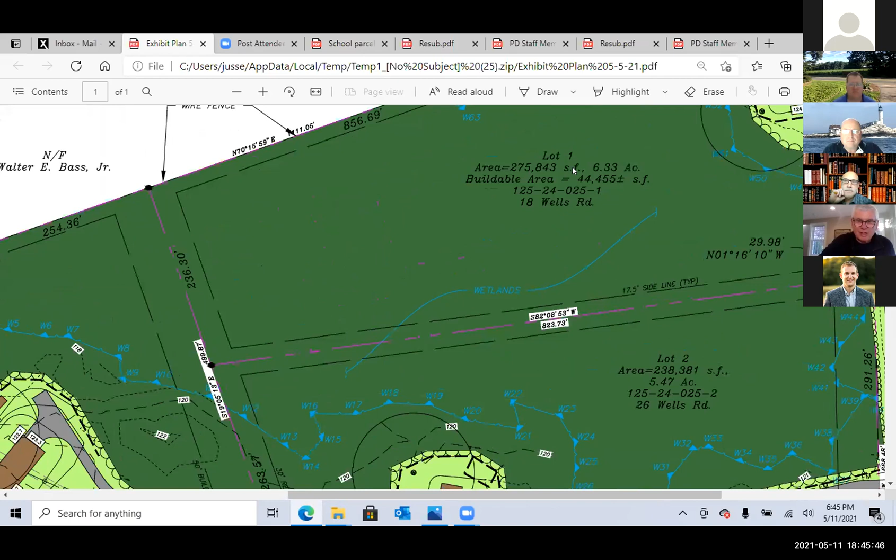So as I said, it's about 47 acres in total. We're proposing 4 total lots. Lot 1 is located here, just over 6 acres in size. I'm moving it around so we can all see it a little bigger, 6.3 acres total, the buildable area 44,455, which is just over your 43,560.

And we're showing a new home located up here in the front, some clearing limits, a wetland line that kind of wraps around the back and then goes off the property to the north.

We do have sanitary sewer here in Wells Road, which was part of the North Road sewer project that went in 3 or 4 years ago. It comes up Wells Road almost to the airport and could actually serve it, getting to within their frontage before stopping. This would go back to North Road and then westerly down to the pump station behind WB Mason. So we are tied into the sanitary sewer with all of these lots.

We're showing a proposed home fronting on the 50-foot building line. They'll be served by individual wells. We're showing a well to the rear and a shed off to the right rear of the house itself. The property's relatively level, elevated just a little above the road so the driveway pitches back a bit. It's totally wooded, with the area to the back all woods and everything up front wooded as well.

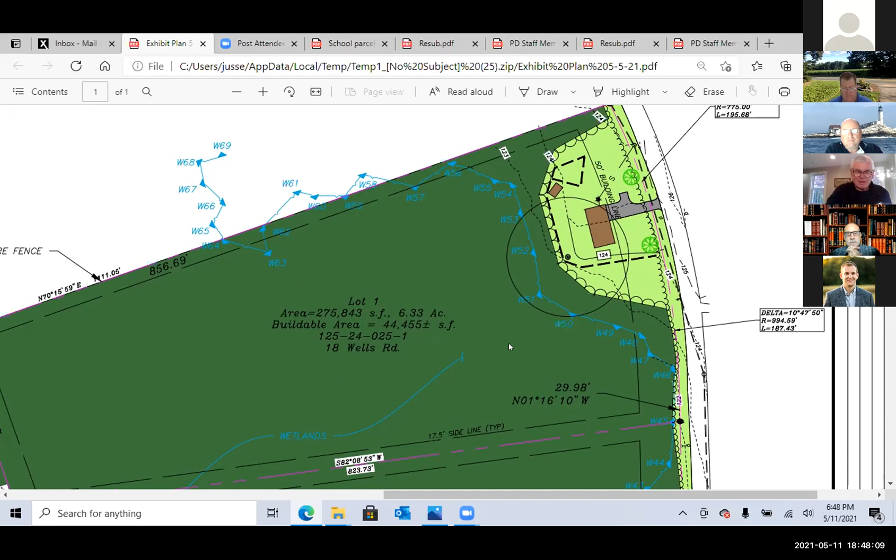My suggestion is that when these lots are sold and developed, you'll probably see individual plot plans on each one that may differ slightly from the concepts we're showing on the subdivision plan, with a look at that time by staff to see whether street trees are actually necessary on the remaining lots. The entire parcel is wooded almost up to the edge of the pavement, so putting street trees on the remaining lots now would mean cutting trees. It would be a bit difficult, so depending on how these lots are developed, some review with staff during the plot plans to determine whether street trees are necessary might be the right thing to do, maybe as a condition of approval.

Lot 2, when we go a little bigger, is 5.5 acres in size. One of Mike's comments was to add the buildable area to each lot, which I've done on a revised plan not shown on this presentation plan. All the other lots have substantial buildable area, I think all over 2 acres. I have a revised plan showing that, which was one of the things Mike requested in his memo. The buildable area on all remaining lots is fairly extensive, measured in acres, not square feet.

Lot 2 would be a frontage lot coming in off Wells, served with sanitary sewer, grinder pump, force main out to the street into the manhole, a well located to the rear, and a driveway coming into a fairly large upland area that's not a wetland. Lot 4, a little further south, just under 4 acres in size, also has a fairly substantial upland or buildable area of about 2 acres, again served by sanitary sewer, grinder pump, force main out to the road, tying into the existing sewer.

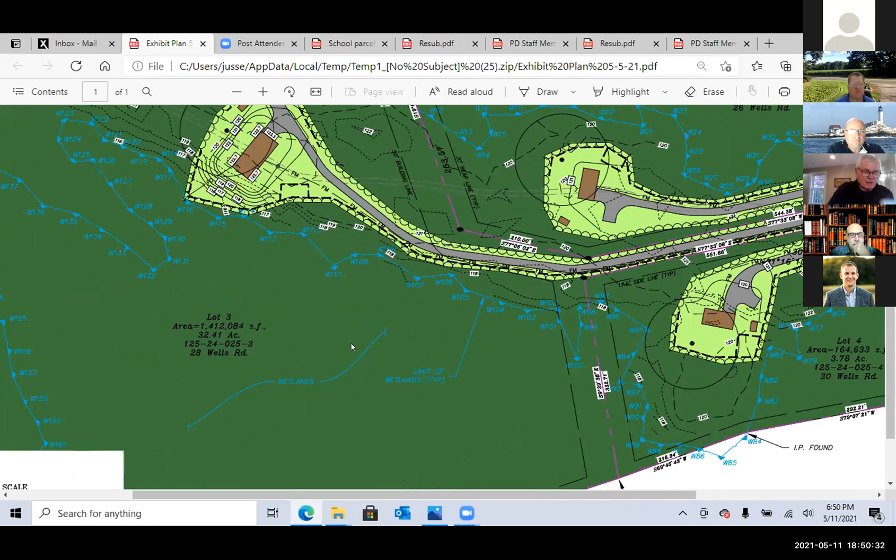The rear lot and special permit lot is lot 3, basically the remaining land at 32.5 acres, a very large lot. In this lot, unlike some others, the front area is fairly flat or level, but in the back we have a little topography, a small hill or knob, and the house sits up a little higher. We're able to get full basements with footing drains on this lot, again with a grinder pump and force main back out to the street, and we have the required 30 feet of frontage or strip going in.

If you looked at Mike's memo, that's one of the things he talked about in terms of your requirements for rear lots. It requires that the driveway be screened, and it also requires that along the building line, which is 50 feet, there be screening.

My comment is that it's all fairly wooded, and we're showing existing vegetation remaining between the driveways, with substantial wooded vegetation in back. My thought is that when this lot comes in with a plot plan and it's going to be developed, staff should take a look at it once we get the driveway in and see where exactly they're going to put the house, how extensive any clearing is, and whether we need additional screening, or whether the existing wooded area provides the screening necessary under your regulation.

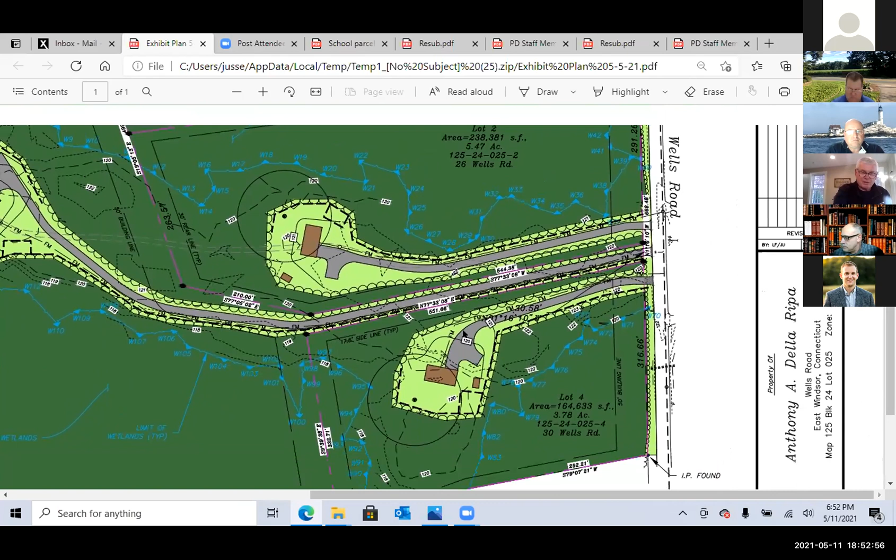I think it's something that really needs to be looked at at the time of construction by staff, and maybe us or a developer, to determine whether some more screening is necessary to be sure we're conforming to the regulation in terms of the rear lot and the screening provided. So that's a basic overview of the four lots.

Mike did have some other comments, and I sent him a memo. I don't know if you have a copy of it, but I believe I've addressed all his comments. There was one, however, that talked about the flood zone.

In the FEMA mapping that we look at, the flood areas talked about are numerous, and the one we're really most concerned about is the special flood hazard area, or the 100-year flood. There isn't any of that on this piece of property. Your regulations speak to the special flood hazard areas and the 100-year flood, and you have specific regulations about development in those areas, with a lot of special conditions that have to be adhered to.

On this particular parcel, way off to the west, within the wetland, there is a small area defined on the flood hazard map as other flood areas. So it's not a special flood hazard area and not a 100-year flood area. It's not an area you wouldn't be able to build on, assuming you get here on this particular parcel—I don't think you can—and it's not something that requires flood insurance through FEMA like the 100-year floods do.

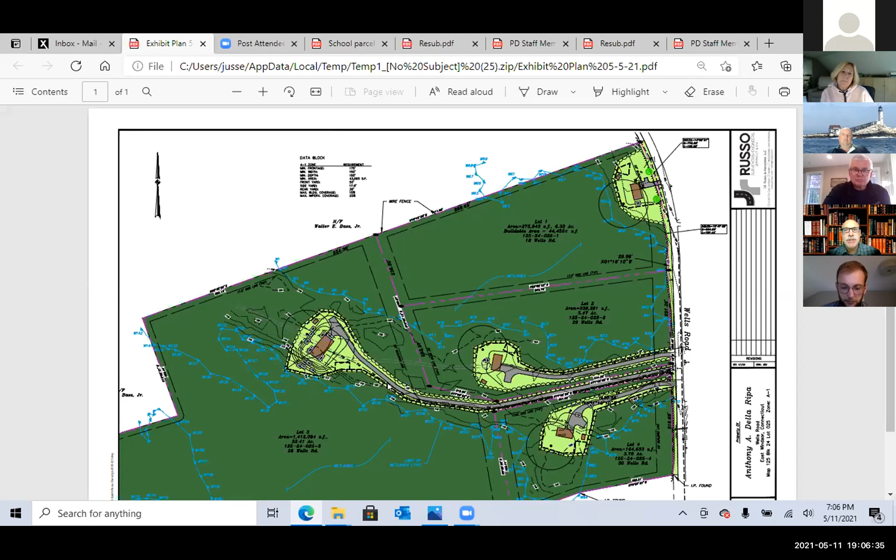I got a couple questions. In particular, lot 1 regarding the house position, and this is really about the roadway configuration. Obviously there's a vertical curve in the road there, but how about the horizontal? And at which sight distance would be limited at that driveway?

Looking to the north. You know, Joe, I would have to measure it. I couldn't tell you exactly what it is. I know standing at the edge of the road there, you can see up to Roller Cut Road where it comes in. I would have to measure it for you to tell you what it is. I mean, it's hundreds of feet. Is it 400 or 500? I don't know, I'm not sure of that, but I would actually have to go out there and measure it to tell you what it is. In working out there, I didn't really see anything that would have told me sightline was an issue there, but I can't tell you that I honestly measured it.

I wonder when the individual plot plans come into the town for approval, whether or not that's an element that staff is looking for, because these are just general concept plans, as you made mention, as you referred to earlier. So Mike D'Amato, would they be looking for something like that?

As far as the locations dealing with the roadway, the driveway curb cut onto the local street, it would go to Len Norton for review as part of that process. For an individual plot plan? Correct. Okay, I'm good with that.

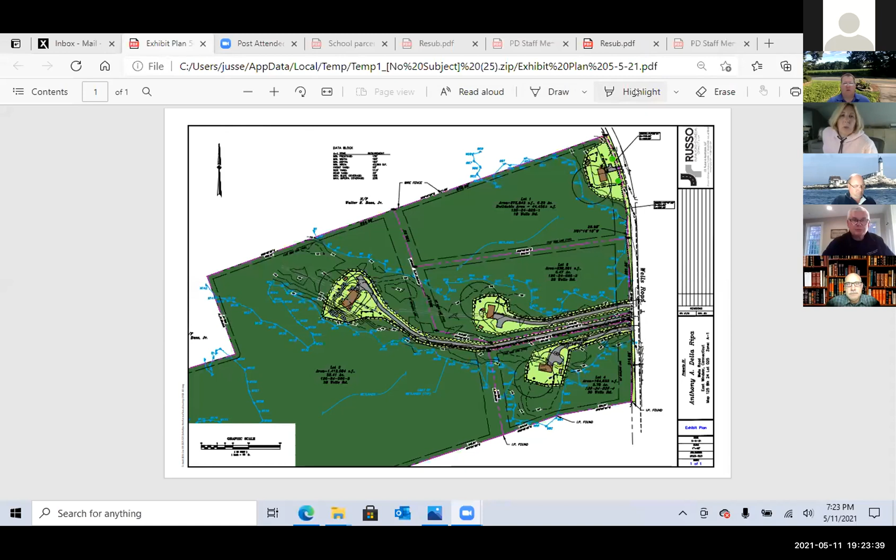So this is a Church Street property. It is a re-subdivision. And again, let me go to share screen here and see if we can get a plan up. There we go. Can everybody see that?

Yes. Okay, so this is 7 Church Street, as the application says. It's a re-subdivision. It's a parcel of land that borders the intermediate school on the north side, on the east side, and partially off to the west side.

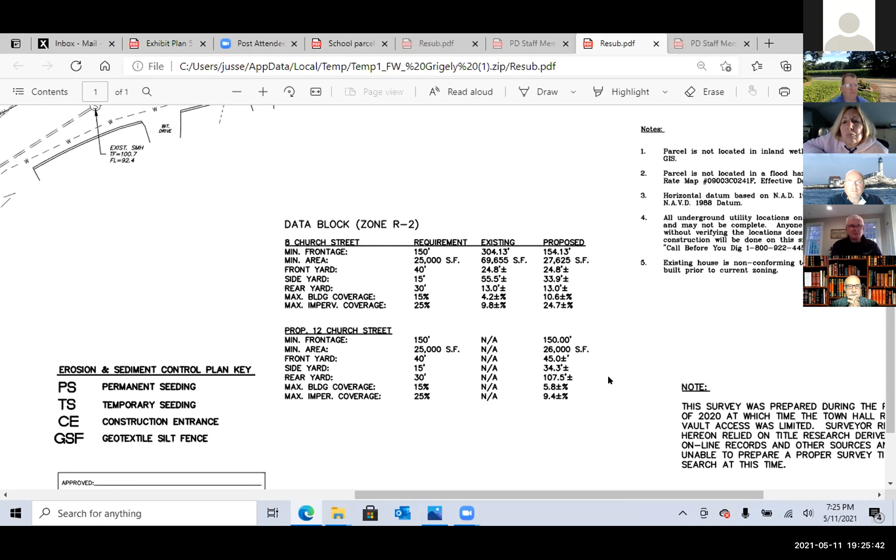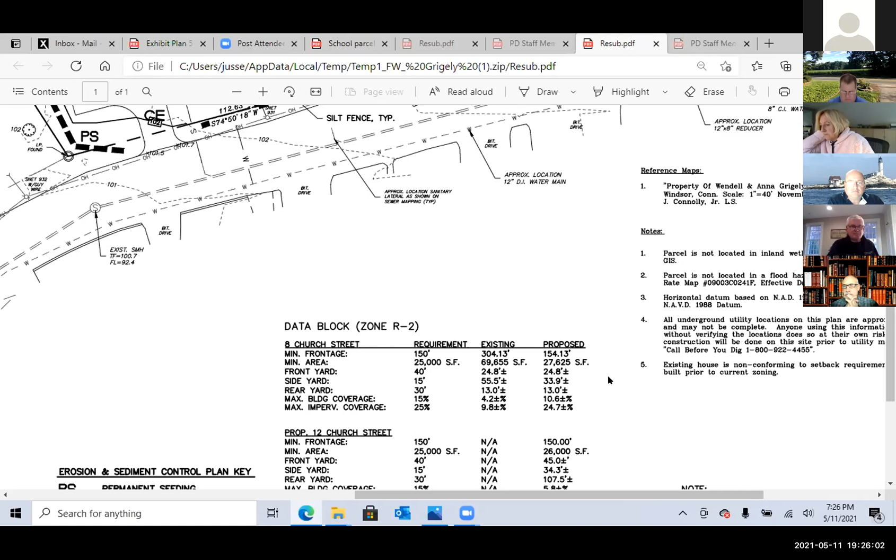We can tie it into the sewer and into the water. And then when we do that, the existing house still has enough remaining land to meet the frontage. We've got 154 feet of frontage left for 8 Church. It's got 27,600 square feet of lot area left. And it meets all the required setbacks.

Because it's essentially existing and we're not changing any of those, the new lot line that we're creating keeps the setback requirements within the required minimums for your zone and doesn't create any nonconformities. The existing garage and shed don't meet the rear yard requirement, but that has nothing to do with this proposed re-subdivision. They don't meet it now. The existing house doesn't meet the front yard requirement, but again, it's an existing condition and really has nothing to do with the current 40-foot building line requirement and doesn't involve the re-subdivision.

It's an older home. I don't know if any of you have been by it. It's a beautiful brick home. In fact, I went by it again today, which I normally do before a meeting, and kind of looked at it myself and said, boy, that's really a nice house. And maybe it needs a little work. I don't know on the inside, but it's a very pretty home on Church Street, probably one of the nicer houses there. So here conceptually, we're proposing a new home on what we're calling 12 Church Street.

And again, 26,000 square feet, so meets your minimum, 150 feet of frontage, and a new lot line along between the other house and outbuildings, which comes here off of Church, comes back, turns to the left, and then again goes to the back lot line adjacent to the intermediate school.

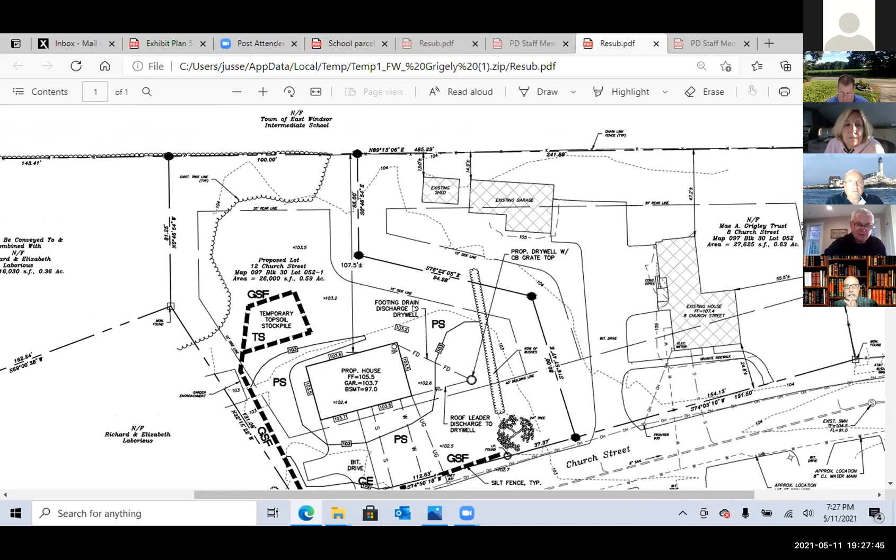It's all open except for the rear parcel here. You see there's an existing brush line or tree line. And again, this is an open field. There's a row of hedges located here and one large, I think 24-inch tree that's located up here in the front, which we would like to remain. Again, sewer and water connections out to the street, bituminous driveway.

Did have a couple of comments from Len Norton with regard to the drainage. He asked us to provide a dry well for the roof water, which Tim Kuhn has added over here. And we've got also a footing drain, or a sump pump going into that if it's needed. I'm not sure that it would be here.

It's pretty sandy. And then he asked us to grade the driveway and kind of tilt it to the side, if you will. If you look at the contours crossing the driveway, they're not perpendicular to the driveway itself. So we're shedding the water off of the driveway into the lawn area before it gets out into the street.

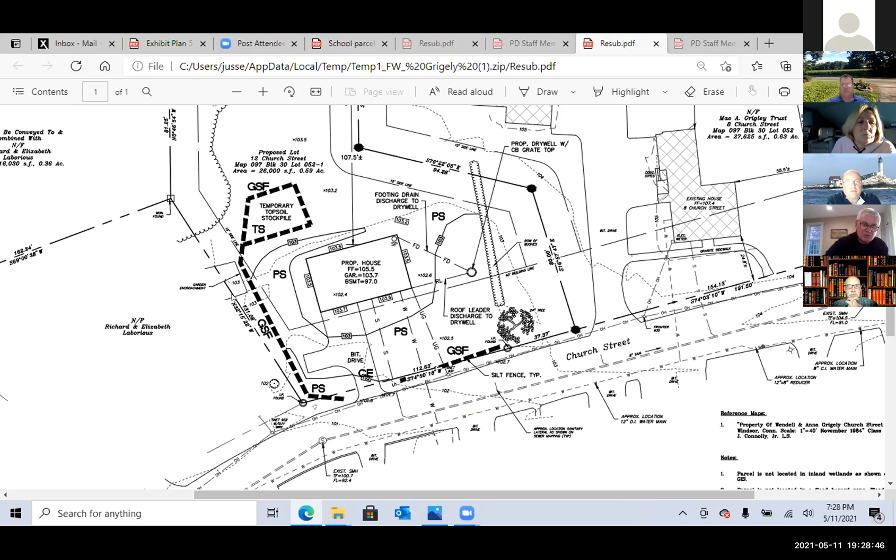So those were a couple of comments that Len Norton had, and we've addressed those and sent this information back to staff. I don't know if you have a new memo from Len yet. You may not have, but it's something that we did do, and believe that we meet the requirements that Len was looking for to make it a little more desirable for him in terms of mitigating any additional runoff coming from the property with the new house and the driveway.

Again, there's some waivers that we're looking for here in terms of sidewalks and streetlights, and it's an existing roadway, obviously, and we're not proposing any new roads. And we're also looking for a waiver of the open space. And here we have a situation that's a little bit different.

And I did run across it once before in another application a few years back, and I don't remember whether it was in East Windsor, but what's happened here is that back in 1965, Dave Grigley's, and I'm going to say grandfather, and I'm sorry if I'm wrong, Dave, I don't think it was your dad, but I think it was your grandfather, gifted about 8 acres of land to the town when they were constructing the intermediate school.

And it was part of this farm, or the Grigley farm, I think is what I'm calling it. And I believe they were farmers. And he gave this land to the school in '65, or to the town. And when we look at the deed, it says consideration was $1. The assessor's card says that there was no consideration, that it was gifted, I guess, if you will.

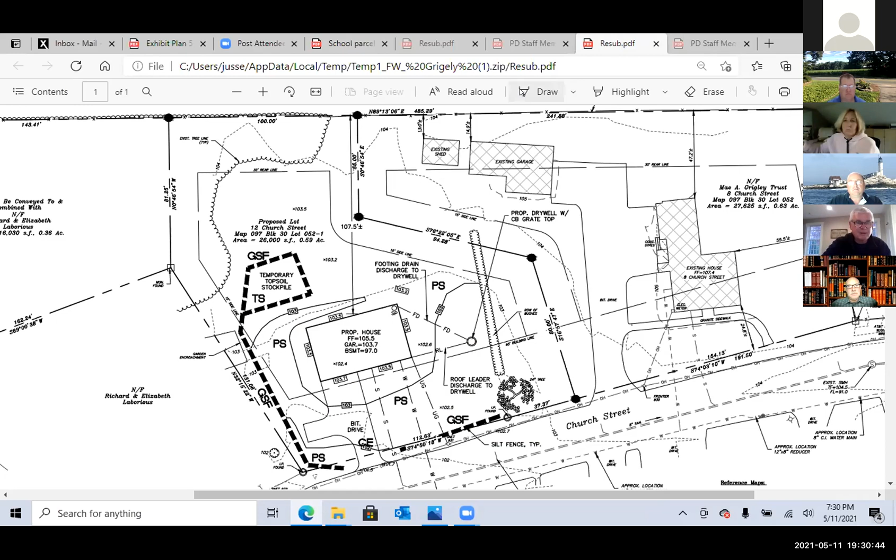And I sent copies of that information over to Mike, and I don't know if he shared it with you, but if you'd like to see it, I think I could show it to you so we could take a look, and just bear with me here for a minute. Let me see if I can pull it up.

So can everybody see this? No, not yet. No, not yet. Okay, hold on. How about now? Yes. Okay.

So this is a survey that was done back in 1965, and it was done for the town of East Windsor by Hayden Griswold. And what it shows here is a number of parcels of land, and you can see here it's labeled school site. Over here it's called open space. The piece that I've got highlighted here in yellow is about 8 acres as I scaled it out, because it doesn't give an acreage. And if you look right here below where it says open space, it says now or formerly Grigley.

The part that we're looking at right now in terms of this re-subdivision is right here where my cursor is at Church Street, and it says Wendell and Anna Grigley. And this is the piece of land that we're now looking at that's part of this re-subdivision. They retained that. This was their home, the garage and the shed and so forth, and the rest of the farm. They kept that and they continued to live there, but they gifted this 8 acres to the town of East Windsor. And this particular survey shows that. It also shows other parcels here that were part of the school site that were owned by other owners, but this happens to be the Grigley parcel here.

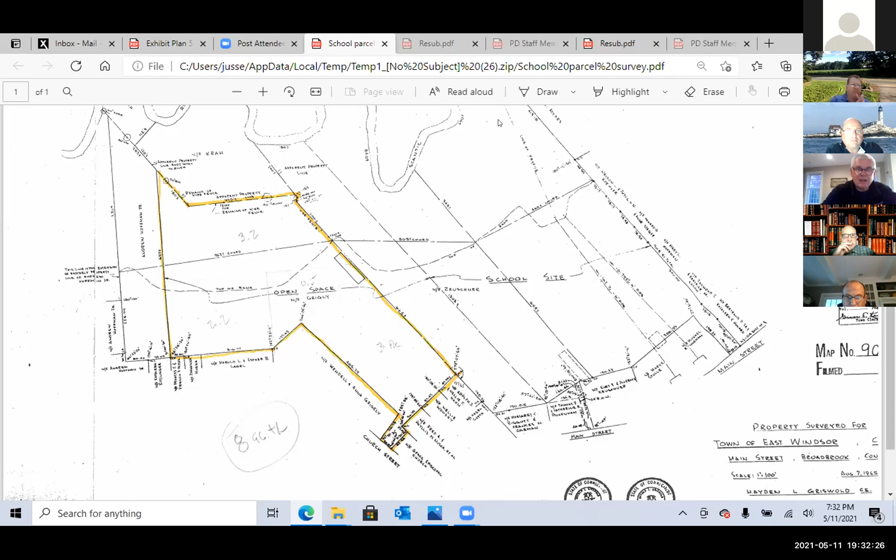Now, I also have here, and let me see if I can come up with that. That's what I'm looking for. Well, maybe I don't have it. I thought I did. I thought I had the deed and I thought I had the assessor's card, which I sent over to Mike, but I don't think I must not have scanned it.

So let me go back to the resub plan. So can everybody see the resub plan now? No, it's not up yet. Okay, hold on again.

Jay, you have to get used to sharing all these plans. We'll be back in person. I hope so, I'm ready. How about now? It's there. Yep, okay.

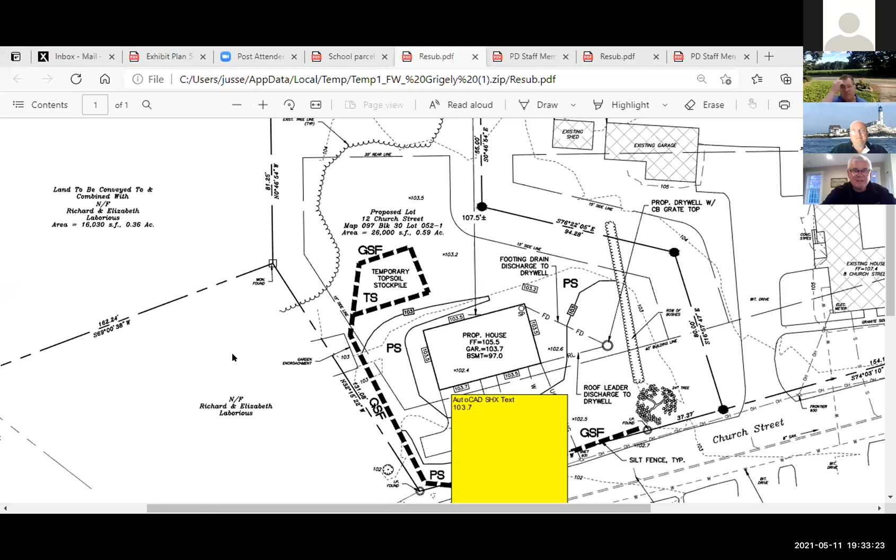So again, the school is off here to the north, and that's the 8 acres that was shown on that plan. I did send along a copy of a deed, and the deed actually matches the deed reference on the assessor's card. The dates match—it was 1965 when it was conveyed to the town.

According to Dave, he remembers his grandfather saying that some of the school land was part of the former Grigley farm that he gave to the town back in 1965. So that was the reason for the request for the waiver on the open space—a substantial amount of acreage was donated to the town some years back. It appears we've got pretty sufficient evidence indicating that that actually happened.

So that's one of the waivers we were looking at, along with the sidewalks and the streetlights. I think we addressed Len Norton's comments with the addition of the dry well for the roof leaders. I don't think there was anything else in Mike D'Amato's memo that I missed, and I know he'll chime in if I did, because I could have.

But that's an overview of what we're looking to do here. So it's one new lot, meeting your minimum requirements for the zone, existing house, garage, and shed being retained, and then that portion of the rear piece of land over here to the west or northwest, which will be combined with the property owned by Richard and Elizabeth Laborious.

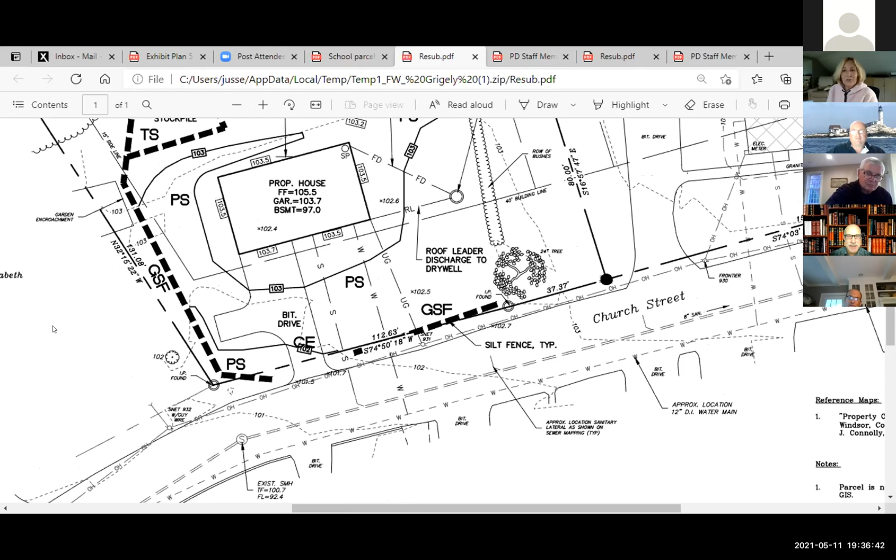I don't know the street at night, so I can't really comment on the street lights. I would like input from anybody on the commission who has driven that at night. Yeah, I know somebody who might be able to weigh in on that. Right, that's what I was hoping.

I think that the concept of having donated 8 acres to the town is a very reasonable concept, unless the commission has in the past not accepted that kind of idea, or we can't. But I think that's a very good argument. So that's really all I have on that.

Thank you, Ann. Mike Kozlowski? Yeah, I am very familiar with this location. There are street lights, and there's a pole, I believe, right in front of that property that I think has a light on it, right there. I've lived on this street for over 20 plus years—it's always looked to me like a vacant building lot. So it makes sense that it gets developed into something.

That's all I got. Do you have an opinion regarding the open space and the sidewalks, with the waiver request for both? Yeah, I mean, as much as I would love to see sidewalks on our street, unless we did the entire street, that little part would have no value at all. And I think the family has been more than generous to the town already, providing all that land for the school system.

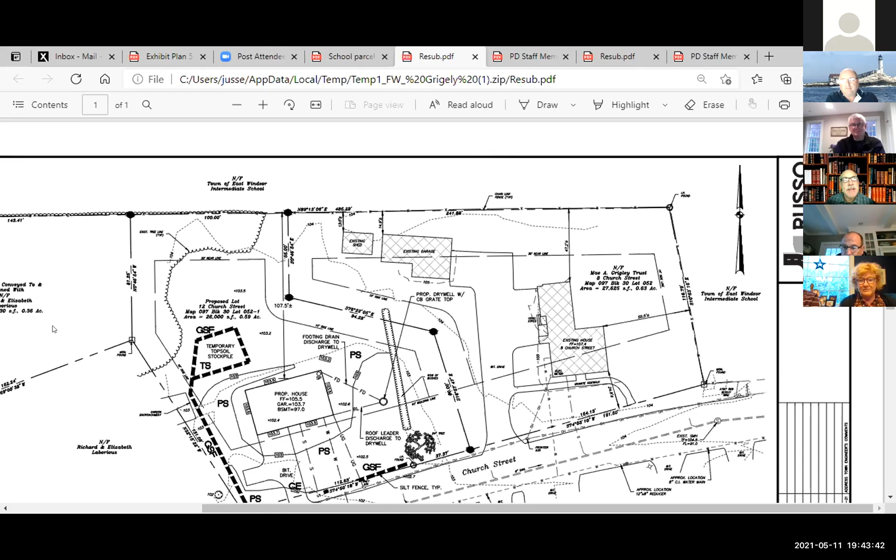Mike D'Amato, do you need some more time other than tonight to research whether this course of action is legally binding by the commission? Because I think that's the way we'd like to head. Do you want some more time just to confirm that, so we don't get ourselves into trouble? As much as I'm sure we'd like to get it done tonight, I would like a little bit of time.

There's no question that the provision of giving this parcel to the town absolutely meets the intent of the regulations. If you read it, it's very clear. The problem is when you start talking about exemptions, it's also very clear that we would not be waiving the open space, because they've given open space, so we're not issuing the waiver, so you guys can't approve the waiver. We would have to basically back into an acknowledgement through a note on the plan and a finding that they provided open space to the town in a total of 8 acres, which we would note on the plan, right? So like the commissioner said, it happened in a different order, but we're not waiving the requirement because they provided well beyond what would have been required if the subdivision were approved. I just don't want to get you guys backed into a corner down the road, and there's some language in here that talks about at the time of application, and some other things. So I would prefer to have a little bit of time to pull something together so that we're ironclad with the understanding that that's the way we want to go.

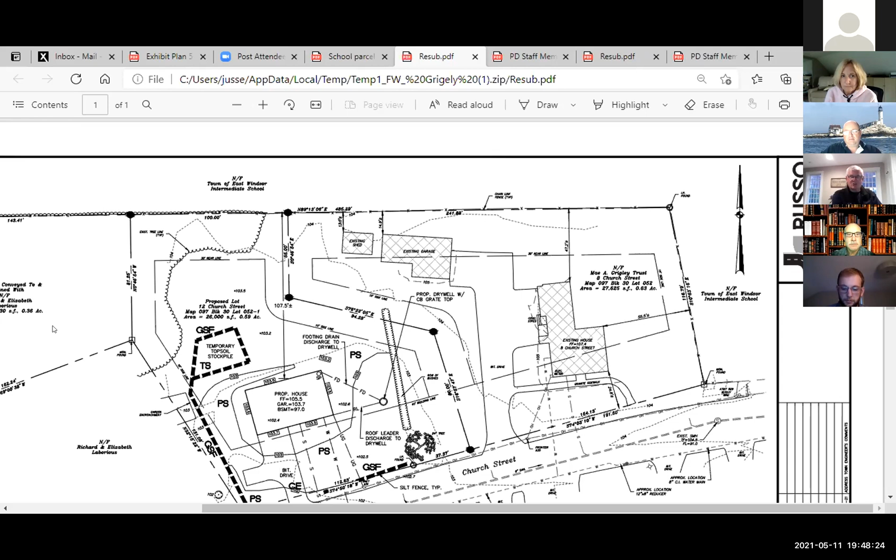So unless Dave Grigley or Betsy have an issue with keeping the hearing open for a couple more weeks, I think that's fine on my end, and we can put something together to make everybody comfortable with what we're doing as it moves forward.

I have no objections, Jay. Fine. Jay, I'm fine with that. I think that's a good solution.

Okay, terrific. Thank you. So any final comments from the commission or staff before we continue the public hearing to our next meeting? Yes, Mike. I mean, this parcel of open space, if we were looking at a brand new application for development, it would meet all the criteria for what we want for open space. It's adjacent to publicly owned land, it has value. So I think all of the open space requirements are met regardless with that piece of property. We're not doing anything that we wouldn't normally accept as open space, just in reverse order. Exactly.

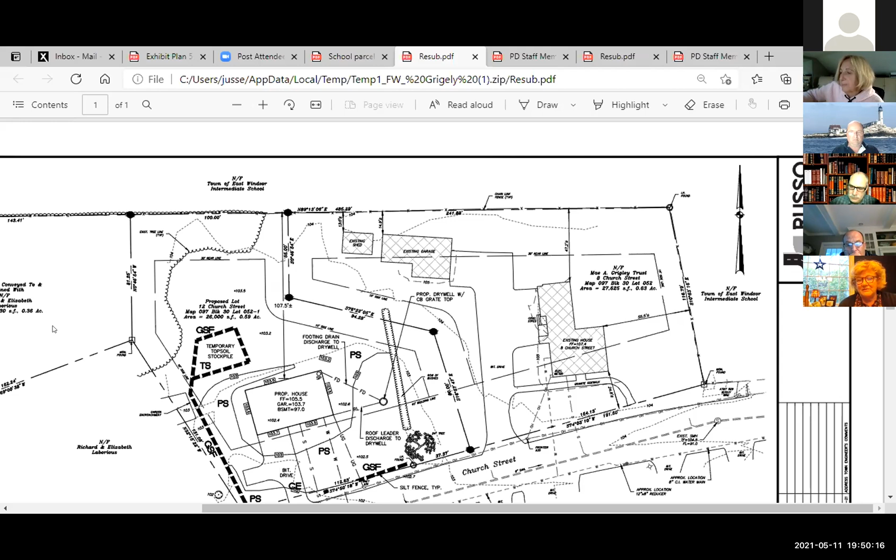Very good. Okay, with that, I'll entertain a motion to continue the public hearing to our next meeting. I'll move to continue the public hearing on application PZ 2021-17, 8 Church Street re-subdivision. It's a 1-lot re-subdivision, map 097, block 30, lot 52. It's an R2 zone, and it will be continued until our next meeting, which is May 25th. There's a motion on the table to continue the public hearing to May 25th. Is there a second? Second.

There's a second. Any discussion? Hearing none, I call for a vote. All those in favor say aye or raise their hand. Aye. I see aye, 4 hands, unanimous. Thank you for being patient with us, and see you in 2 weeks. Thank you. Thank you.

Next, our last public hearing for tonight: PZ-2021-18, 76 and 84 North Road and 7 Winkler Road. Special use permit application for construction of an automatic car wash accessory to an existing automotive filling station. The owner applicant is Noble Energy Real Estate.

Good afternoon, Tim. Good evening. Welcome to the second part of the J.R. Russo tag team.

I am Tim Kuhn with J.R. Russo, here tonight representing Noble Energy Real Estate, along with Mike Frisbee, the owner and applicant. You likely recall that we were in front of you in March with a request for a text amendment that allows a car wash as an accessory use to an automotive filling station in the B3 zone, and you were kind enough to approve that text amendment. So we are here tonight with our site plan, seeking site plan and special use permit approval for this car wash. I will share my screen if I am allowed.

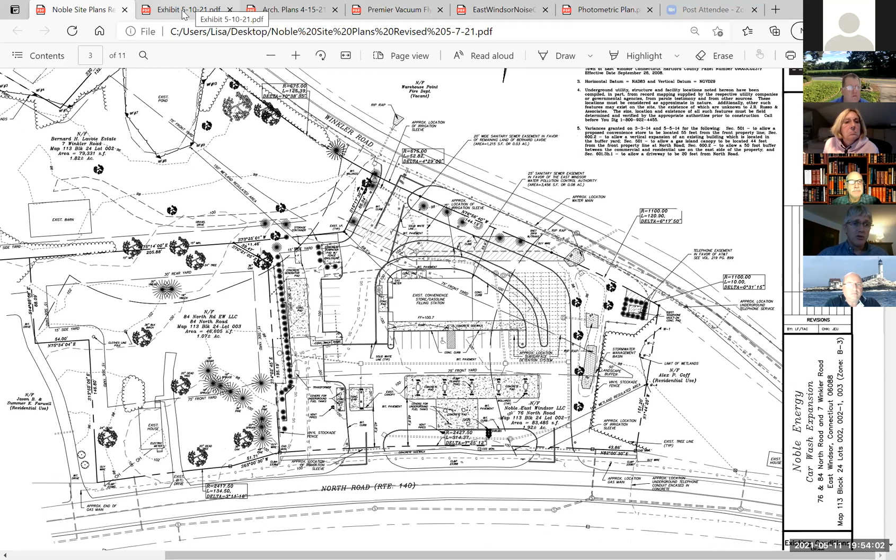So we are proposing to merge the 3 lots and construct a 2,771 square foot car wash, which is an automated car wash, accessory to the existing gas station.

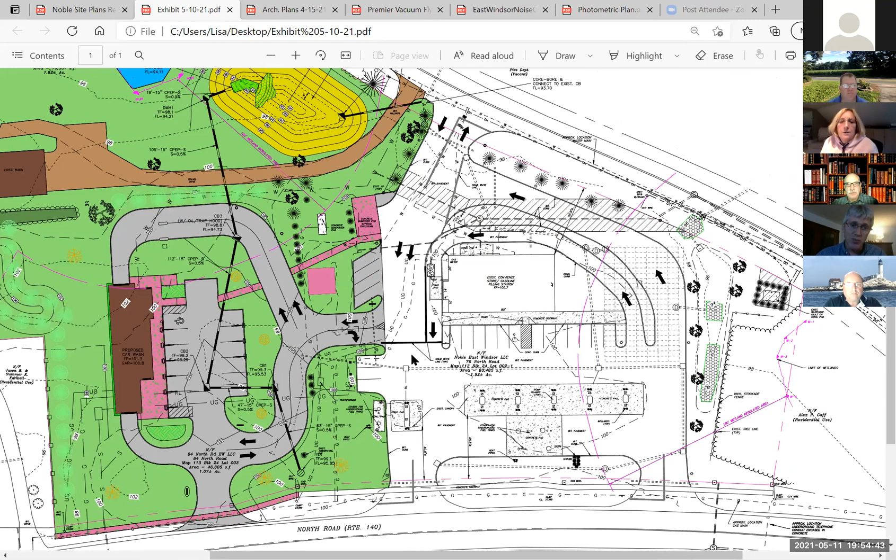Access, we are proposing a curb cut off of North Road, as well as an interconnection with the existing driveway that goes around the gas station. As you recall, the gas station circulation is essentially one-way counterclockwise around the building, and you'll notice that it comes here. So this portion of the driveway is currently one way from south to north through this area.

There will be a parking lot to the west of the building. This will be the location of a couple of employee spaces, as well as some vacuum facilities. There will be a queuing lane for the automated car wash, which kind of wraps up and around to the south of the building. You go through the automated car wash, you come out on the north side, and then you can either go back out to North Road or back to the gas station.

I will also mention at this point in time, the application does include the installation of 3 new electric charging stations at the 3 existing parking spaces at the existing gas station. Right now, we're showing them located here, although I believe there's also the potential that they might be moved up to these northern spaces. That's something I don't know if he's decided on yet.

The site will be served by municipal water, sewer, and natural gas. The car wash will have a water recycling system, which I believe reclaims approximately 65% of the wash water for reuse. The site will also be served by a new on-site stormwater management system, which will include catch basins in the paved areas and parking lots to collect the runoff and convey it to a new stormwater management basin, which will be constructed on the lot at 7 Winkler Road. This basin will discharge to an existing catch basin at the edge of Winkler Road, which ultimately discharges across the street.